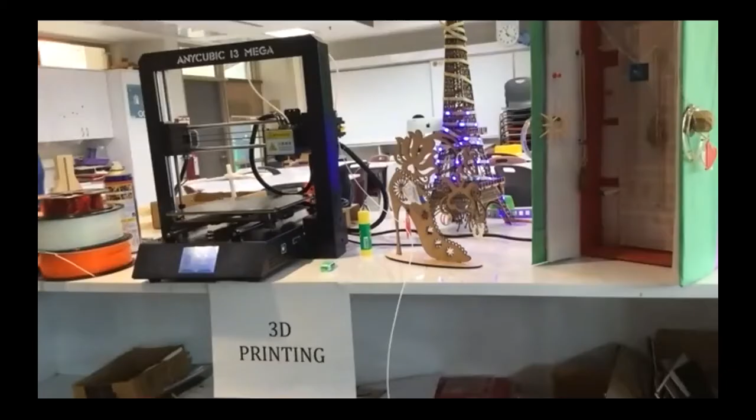So what all can you make with the 3D printer? Great question, ma'am. So tell me anything, any object that comes to your mind, and I'll say whether we can print it or not.

Then it will give you a vision like, oh, it's all over the world. Like starting from the human body, in today's time, 3D printers have developed so much that they can print a little tiny, you can say, live heart. Yes. 3D printers can give you stem cells, which we can use in different cases of a person suffering from major diseases.

The objects behind, are they all printed from this 3D printer? The Christmas tree, which is like the Eiffel Tower, I can see behind it. Is it printed through a 3D printer? Okay, so whatever is in the background, it is a mixture of laser cutting and 3D printing. Laser cutting we will be having tomorrow. Today we will be focusing on 3D printing itself.

So I'll just show you how a 3D printed Eiffel Tower looks like. So let's all begin. And this going to miniature pieces, the size all depending upon the printer size, or it's just what we said? You're correct.

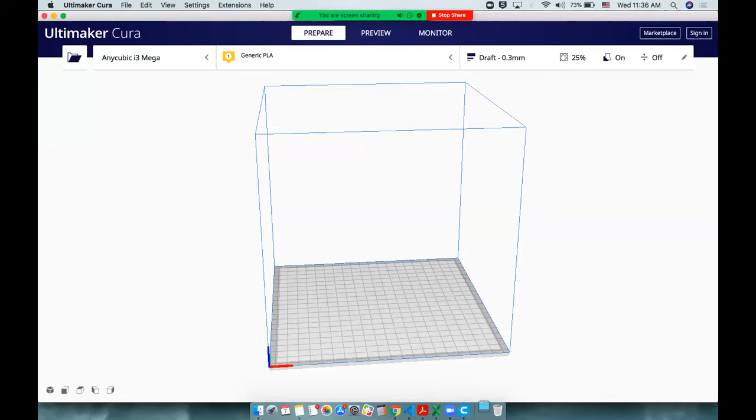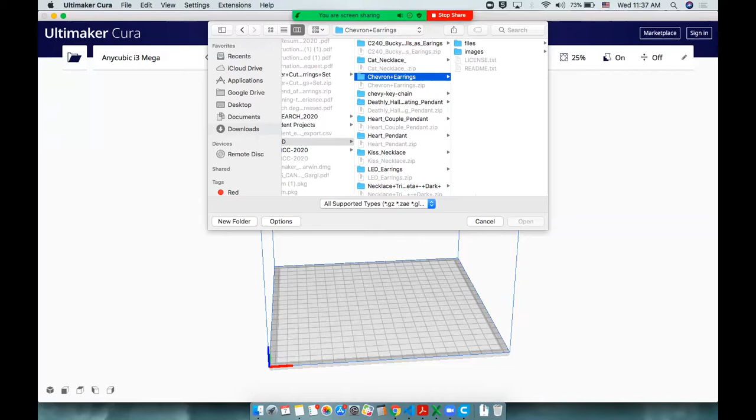Let's try this one. Okay, maybe I have already downloaded a few files. I'll use them. This is your load option where you go and select from your system where your files are stored. So let's go to this one. Okay, Mr. Delfino is here. Fine. Let's go to this folder, file. Yes, these are all STL. I can work with any of them. I'll select them. Okay, now the files are loaded.

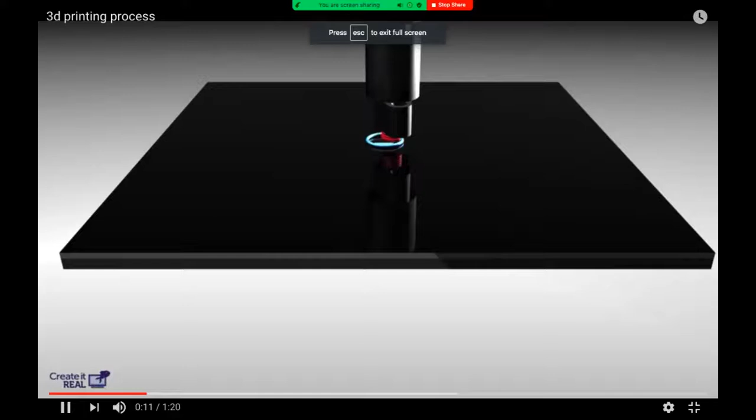Now this slicer will give you a virtual experience of the actual process which will happen on your 3D printer. Now, when things are happening on a 3D printer, there are various stages. Okay, so I would like to stop here and show how 3D printing actually works. Then I'll explain every step. I'll show you something. So let me share my screen again. Share. And I would like to show you the actual 3D printing. Go through the video. I'll again replay and I'll start explaining.

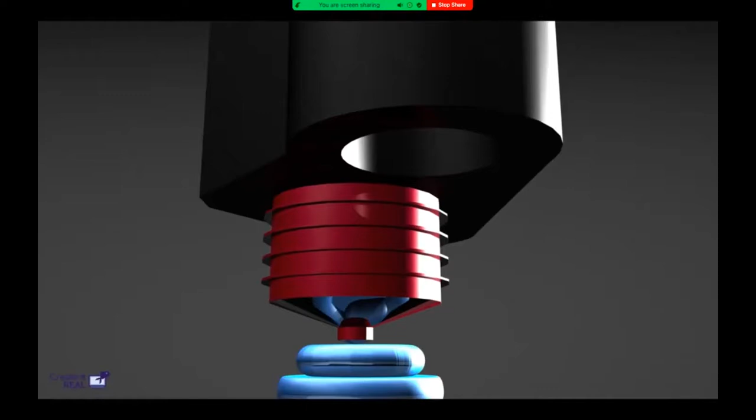Perfect. Now, this particular plate is your build plate where the actual model is building. Now, this has some length and width, okay? That is your X and Y axis. Now, this one is the nozzle. This nozzle can go up and down, okay? So this will become your third axis, that is your Z axis. Now from this nozzle, the entire assembly is called extruder.

Okay, let me write it. First we discussed STL, now extruder, and we discussed the build plate also. Okay, now the extruder is not a single entity, it's a kind of assembly. It will have a thermistor, a temperature sensing device. Now, why do we need temperature? We need temperature because of the actual material with which we are printing, for example, we are printing this Eiffel.

So in this Eiffel, the filament or the material used is a plastic material. Okay. The printer which we have can only print plastics, or polymer, we can say. Now in this polymer also, we have only a few categories of printing material, that is PLA, polylactic acid polymer. Then we have ABS, and then we have TPU. Now these are the basic acronyms.

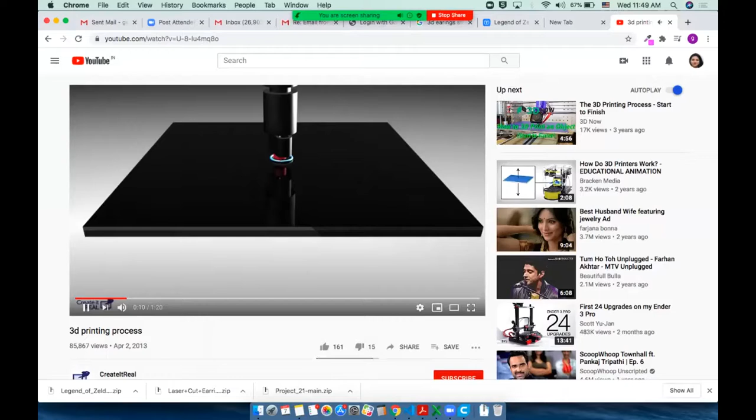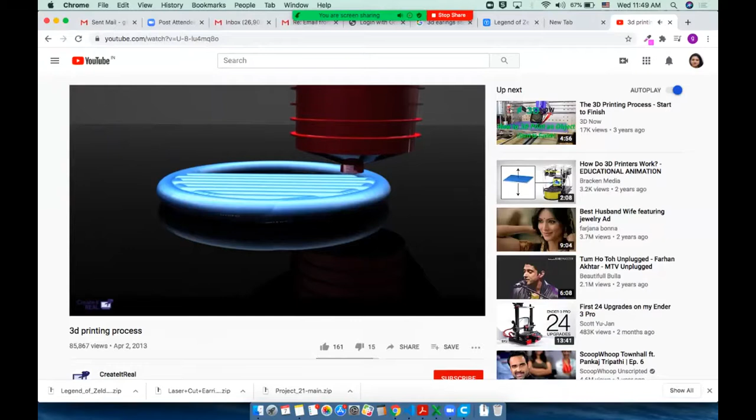Now layer by layer we are dropping that liquid. Basically we are changing the Z axis with the help of the nozzle, and your X and Y axis remain constant. So layer by layer. Now how are these X, Y, Z axes generated? That is where your slicer comes in. This slicer, this platform, will convert all your curves, edges, holes, every minute detail into 3 coordinates, X, Y, and Z. Now how does it do it? That is your slicing part.

So once you slice it out, it converts the STL extension into G code. So what is the role of the slicer? It will convert the STL code into G code. G code is a generic code or geometrical code, with which the actual 3D printer works.

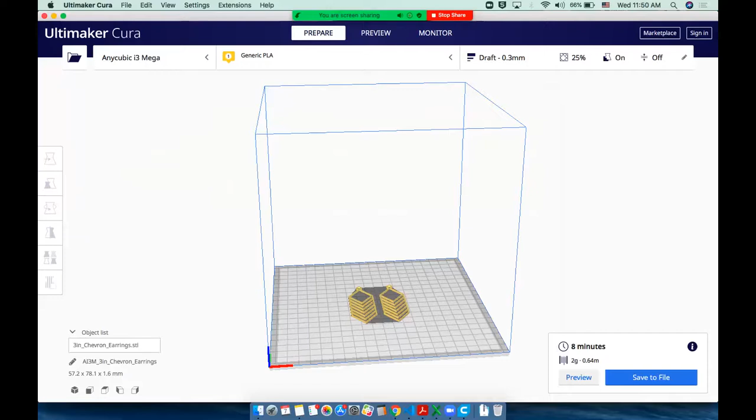Now, during the conversion, you have a lot of power. For example, you are not happy with the size with which these objects have come in. Okay, select it. You have several options. The first option allows you to move in X, Y, Z. They have a graphical aid to tell you X is this axis. You can shift in this. This is your Y, and top is your Z axis.

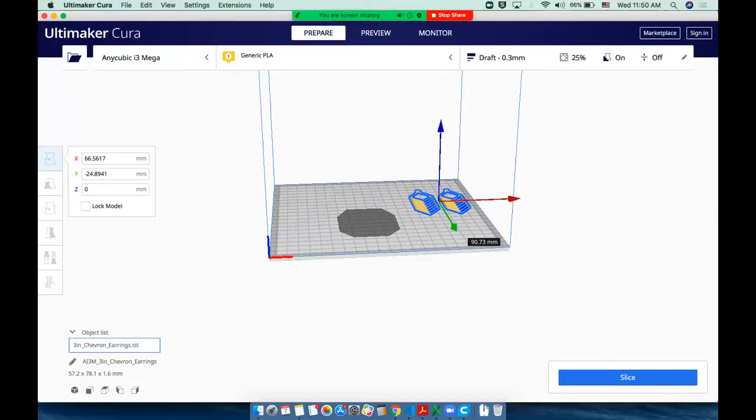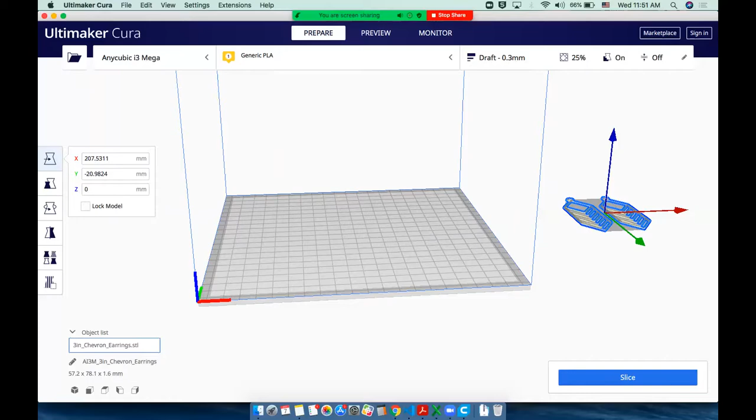Now, sometimes when you are loading the file, it by default goes outside the box. This box is your build area. If you just multiply XY, it will give you area. If you multiply XYZ, it will give you volume. So entirely, go down. Okay, this blue color box, it's a closed box. This box is your build volume. Yes, this one is the build volume.

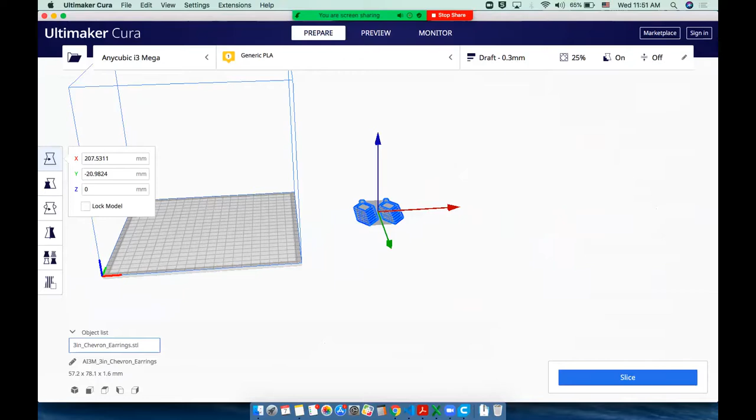So whenever the file is loaded, always keep it inside the build volume, and it should touch your plate. If it's not touching your plate, what will happen? You will turn on the machine, the machine will read the XYZ location, and without dropping the liquid on the plate, it will start doing its purpose. But if the first layer is not touching the build plate, how will the rest of the layers form? It will keep on falling. So that's why it's very important. Your object should be inside the build volume, and it should touch your build plate.

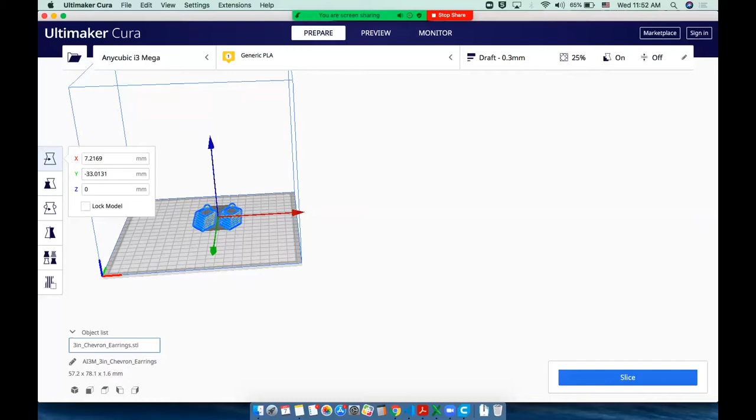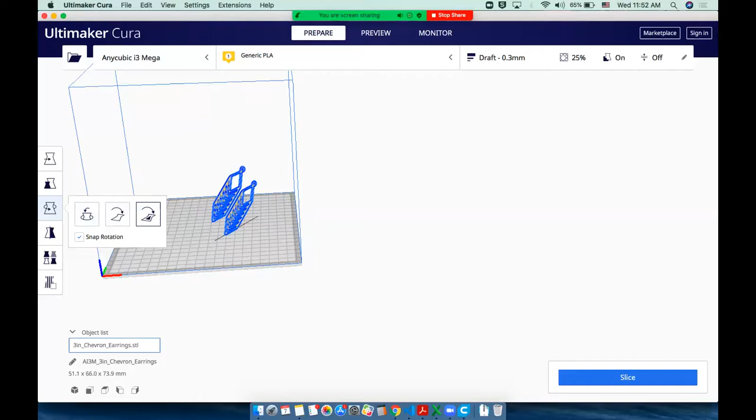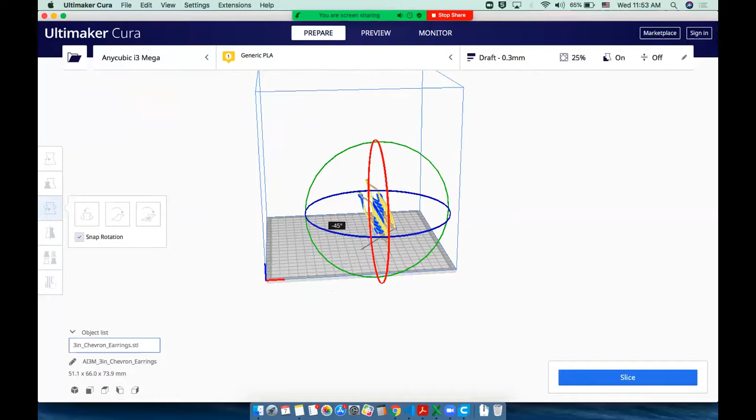Now, how to make it touch the build plate? You have an option called lay flat. You select this option, and in whatever orientation your object was, it will touch the build plate. You have other options also, like rotating the objects. When you click, okay, I just want to reset it. Now my angle has changed, right? So I can select, and these circles can help me rotate in 3 axes, X, Y, and Z. I would like to rotate it in the green one. I rotated half and then I'll press the lay flat option just for a cross check.

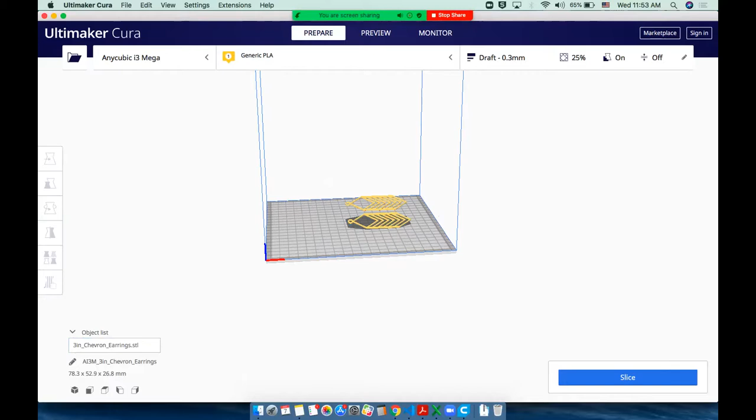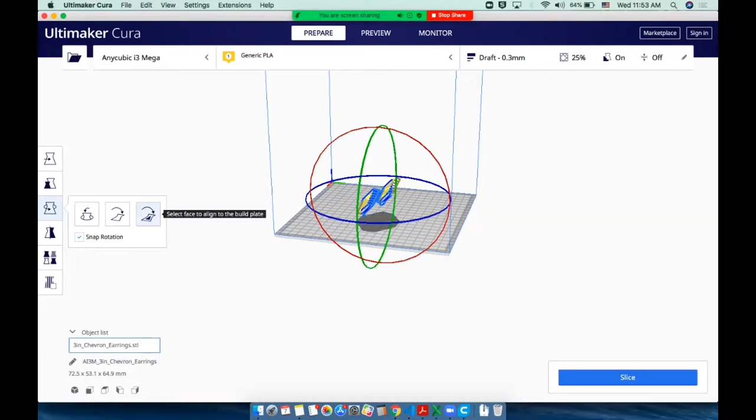Now, once this is done, if you are interested in mirroring, you can copy the object also. You can multiply the object also. Let's start with the basic one. We have placed the object inside the build volume. But I can still see it's not completely flat. So let's go back and rotate it a little bit more. Let's do lay flat. Okay, this looks perfect. Then you click on slice. It will start cutting your 3D object into layers.

But is my camera visible, like when I'm speaking and sharing my screen? Yeah. Okay.

So this particular object has layers. Like we have a bunch of hairs, and what is a bunch? It's a layer. So layer by layer, it has come up. So G codes are generating X and Y at every layer. Now, what should be the gap between the first layer and the second layer? That you can control. When you control that, you are actually controlling the quality of your 3D print. So we have categories like coarse layers and refined layers.

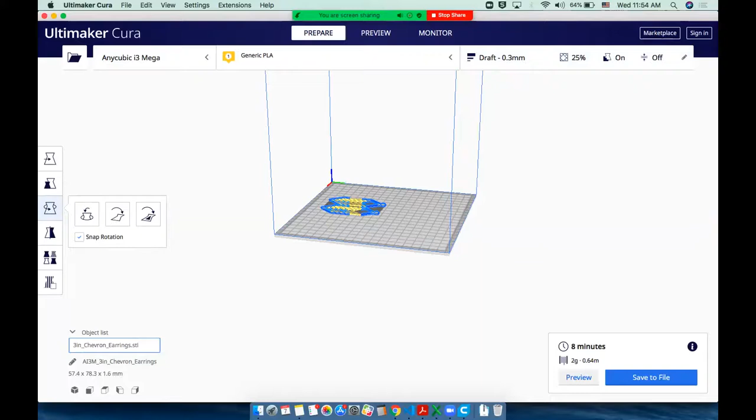If you keep, okay, yes, layer height. This layer height will depend upon various parameters, like the diameter of the nozzle. This is the nozzle. How big or how thin is the diameter which allows the passage of your liquid material. If you keep it within the range, sorry, wrong, yeah. So 0.3 means it's a big diameter for the liquid to come in.

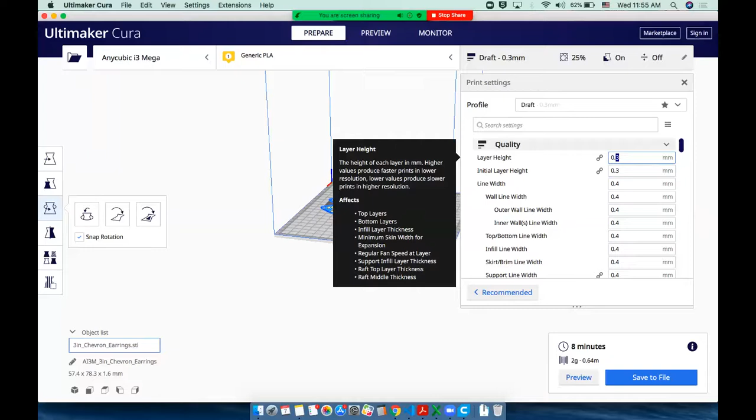0.1 will be a little lesser. So 0.1 goes into a finer or refined object. 0.3 will give you a coarse object. With a coarse object, from a distance you can tell these are the layers. But if it's a very refined object, it's very difficult to even distinguish that it's made up of layers. So that's how the layer plays a role in your 3D printing. Then these are sub properties which I would like to ignore right now because we don't have much time. I'll quickly tell you the basic things with which you can 3D print anytime without anybody's assistance.

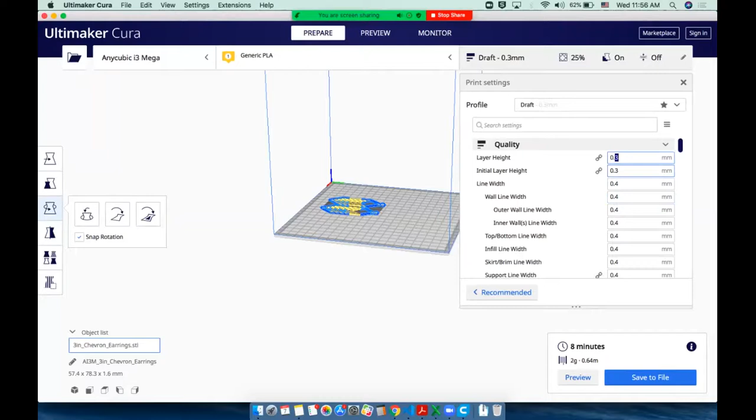Okay, so first thing, you have to take care of the layer height, and then you have to take care of what kind of support you want. So what happens if this is the initial layer? When your print will be ready, when you bring that out, the initial layer should be protected. For that you need support.

So again, the best support you can give depends upon how much time you have to print the object. If you have a lot of time, then give the best support, that is everywhere. Nowhere, everywhere. You choose everywhere. Now if you are running out of time and you know the entire piece is flat, like for this I know there is vacuum, or we can say there is no material. No vacuum, sorry, my bad. There is no material. So in this case, it's not very important to give everywhere.

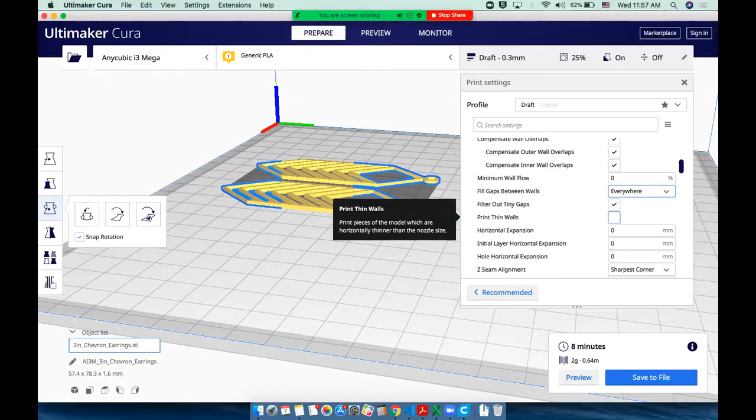Now, when you say everywhere, it will take care of this arc also. And at these square bottoms also, it will print the support material. So depending upon the object orientation, type, your need of time, you select the support material. So second category is done.

After that, you have to check the fill density. Now, what is the fill density? For example, this Eiffel Tower, how strong I want it to be from the inside. Inside strength is your infill density. Now, if you increase it to 100%, see, with 25%, it's showing 8 minutes and it will require 2 grams of the material.

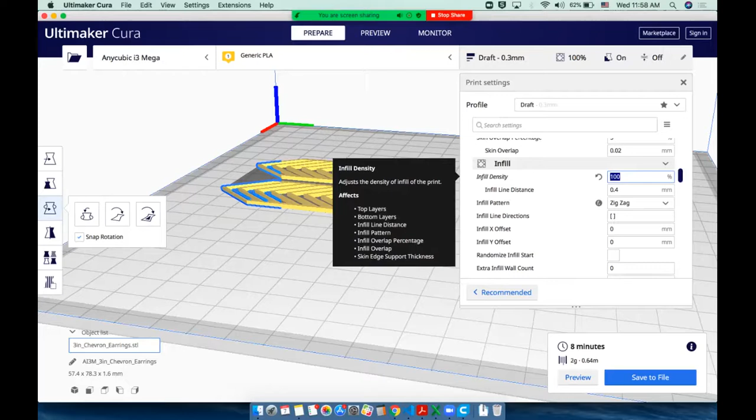If I just make it 100, okay, and then I slice it. It's still 8 minutes. That's probably because of the model we have selected, but with this, it will show you a drastic change. With 100%, it might show you it requires 12 hours to print. But with 20 or 10%, it was showing me around 3 hours, 30 minutes. So the third property which you take care of is the fill density.

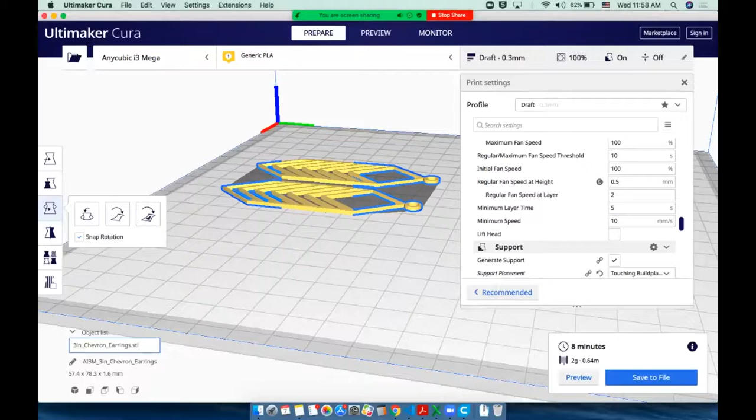Now, after that, we have to take care of the material which we are using. Why? Because we have to set the printing temperature. So PLA, I told you, with our printer, we can print PLA, ABS, and TPU. So for PLA, I put 210, and that's it. Rest, we can leave as default settings. We don't have to bother about them. And then you have to save this file.

Now, when I'm saving this, I don't have a pen drive, but I have a card reader. So I'll just use my card reader. Okay, let's say cancel. Let's say save file. No, it's still. Okay, let me change something. Let me make this 211. And now slice.

Okay, now it says save to the removable device. So I'll save this. Now it will tell you that the extension is G-code. This is what I was talking about. Your STL is getting converted into G-code. Now this G-code, you have to send it to the printer. So we covered this layer part. We covered this nozzle part also.

Nozzle is a diverging converging device. At the opening, it will be a divergent section. At the closing, it will be a convergent section, so that the velocity increases, pressure decreases. And with less pressure, more velocity, the fluid will come and the print will happen faster. Apart from this nozzle, you have a temperature measuring device with which the melting temperature of the filament is controlled. Now, once you are done with the G-code, what is the next step?

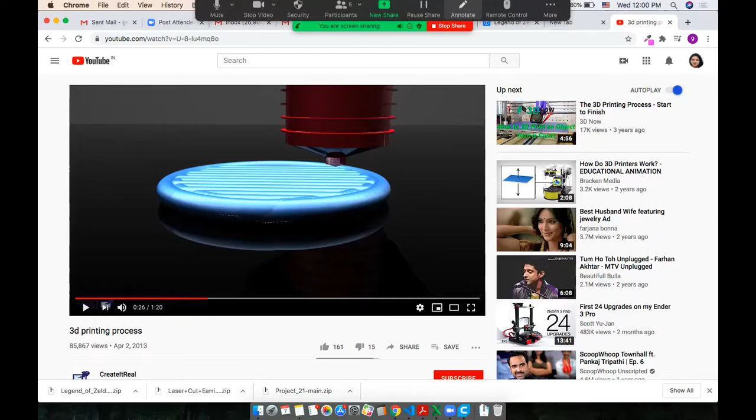So I would like you to focus. Okay, I'll just stop sharing. And I would like to focus on this iPad one. Okay. So we'll just go to the device, insert it. Is this panel visible? Okay, it's at a distance. Let me just adjust the camera. Okay, so various options are visible to all of you.

If you have to calibrate the machine, you can go to the setup and tools, but if you are just doing the printing part, just go to the print option. A number of files are coming, go to your required file name. It will show you the G-code for that. This was the G-code, and click on print. When it starts printing, by default, all the temperature, the time to print, the material to use is fed into the system.

Now, the rest is the automatic thing which your machine is taking care of. I'll explain how the process is happening, what we have seen in the video, and how it will actually happen. So, let me just remove the iPad first.

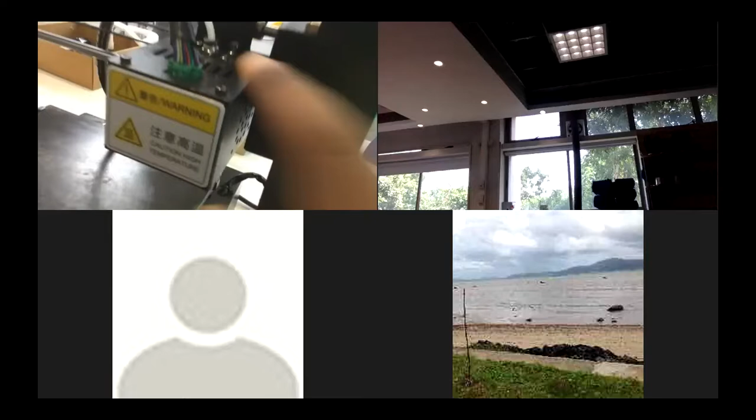Okay, that's enough. Now, this material is getting fed into the extruder through one of your stepper motors. Okay. Yeah. So this part is your stepper motor, in which the actual filament is fed. Now, step by step, your filament is pulling or pushing inside the nozzle. Nozzle is this part, or the entire extruder. It has the heating device, temperature sensing device, and the nozzle.

Let me show you. This is your tiny nozzle. This one. Now, what will happen first? The first thing is your build plate will heat up. Now, as per your different materials, you have different build plate temperatures. Why? Because when the liquid material is coming down from the nozzle, due to ambient air, it will start solidifying. But we don't want the solidification to happen instantly. Okay? We want to wait until the next layer comes in and adheres itself to the first layer. So that's why we keep the build plate at a temperature.

Okay. After the build plate takes its temperature, as you can see, the bed temperature is going to 59 and the estimated value is 60. So once this part is done, your nozzle will start heating up. Nozzle temperature we set at 211 degrees Celsius. Slowly it will rise up. Now, once this part is done, your extruder will take the origin value.

For example, in our slicer, let's go back to prepare, close, move. Where is my object preview? Oh, I'm in layer view. No, but X-ray view. I need the layer view only, but I would like to go to prepare. And in the prepare, where is it? Okay, let's reload again. Okay, it's here.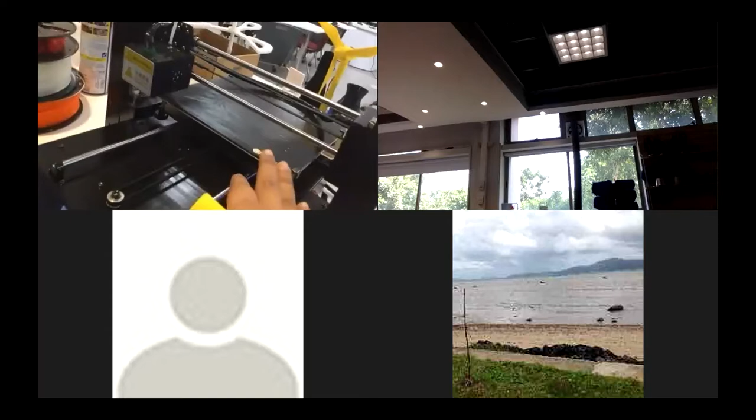Meanwhile, I'll discuss with you some maintenance. Yeah, just see. First, it's going to its home position, both the nozzle and your build plate. And always remember, for better adhesion, we use some kind of gluing element on your build plate. I have already used it, so I'm not using it right now. Now it will take the appropriate Z location.

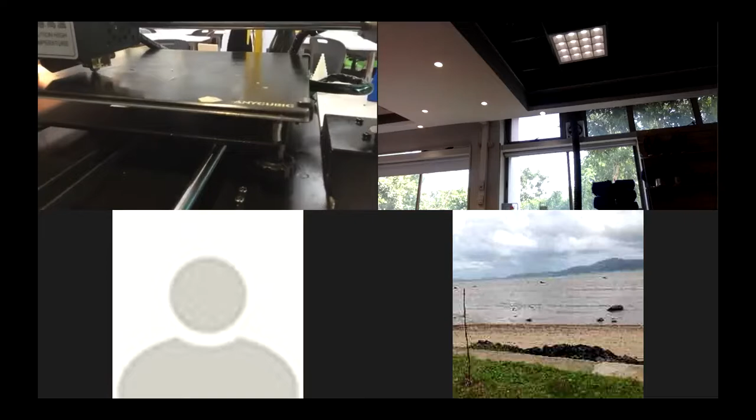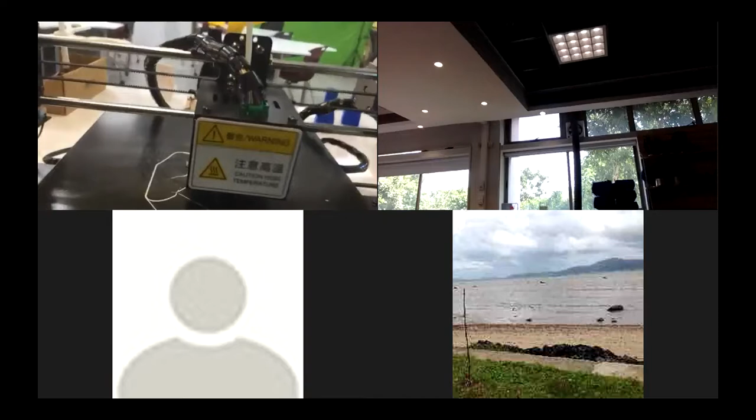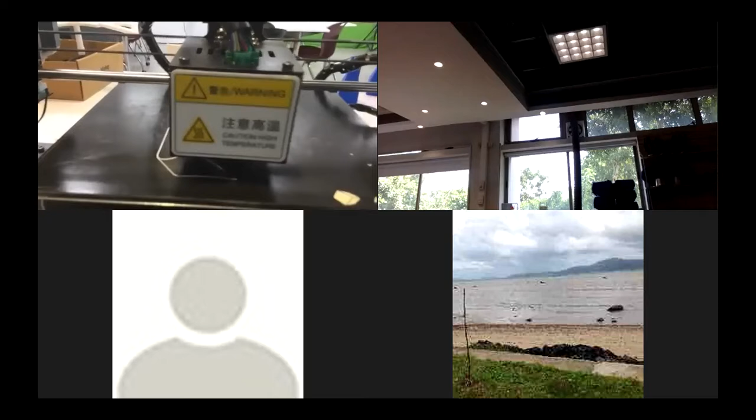It has started printing at the exact location where it was on the slicer. And the first layers are coming. Okay, this is better. Okay, so this place is having less gluing material, so the initial layers are not sticking perfectly. So in such cases, what we can do is stop the print, restart the print, put the Fevi glue, and things will turn out accordingly.

So let's discuss meanwhile what maintenance we have to take care of. So the very first thing we have to take care of is, after every print, clean your bed plates. Okay, you can use any soapy water and a normal cloth to clean the bed plate. For the nozzle, there is a proper cleaning procedure which needs at least 30 minutes of time. So I'll skip that part.

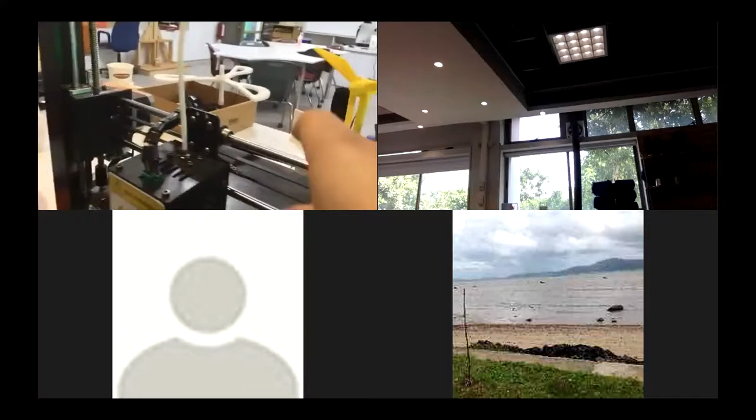Now all the moving bodies like this rod, your stepper motors, are on this steel rod. Okay, all these, this one also, need to be timely lubricated. So one of the best lubricating and cleaning materials we use is WD-40. It cleans and it provides perfect lubrication at the same time. So see, the print is very bad because of the initial layers not adhering. And one more reason can be, I'll just stop this.

One more reason is your bed leveling is not proper. Now, what is bed leveling? I'll just give you a verbal description. Bed leveling means, see, this is your entire bed, okay? It has 4 corners. Now, at all the 4 corners, your nozzle should touch at the same Z location. But because of some inclination, very minor it is, but it is there.

Because of inclination, that is your bed leveling error, your Z location is different here, and the first layers which are coming and dropping on the build plate are not dropping as a flat one, they are dropping at an inclined angle. As a result, your first layers start detaching from the build plate. So, bed leveling is one of the reasons why your prints are not good.

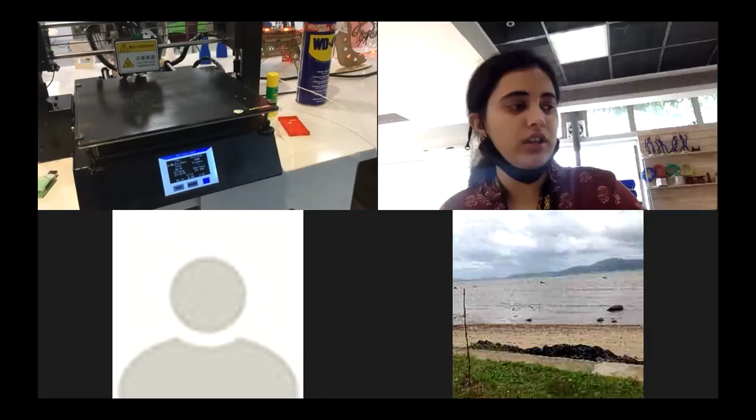Okay, not having a correct temperature is one of the reasons your print is not good. The quality of material you are using decides a lot what kind of print quality we will have. So Guna, this is how the entire printing happens, starting from a 3D model to an actual 3D prototype. You have any questions, queries? You can ask me. Even you, Joyce, also.

So tell me one thing, let's say I'm not downloading any model from anywhere, I want to create something, how can I do that? Yes. So for that, you need a CAD software. Yeah, I know that. Oh, perfect. So we have multiple CAD softwares. Few are online also, 3D modeling online softwares. You can go for SketchUp, Vectary or Tinkercad. Tinkercad is most widely used. Vectary I have recently started using and I find it quite interesting, it's very friendly to a designer.

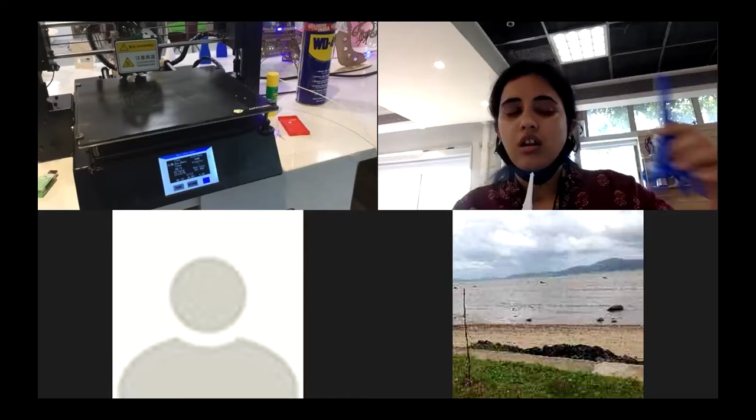Okay, and one more thing, let's say I have some kind of object with me. Can I scan it in a 3D way? Perfect. Yes, you can do that. For that, we need a 3D scanner. We try to work with the 3D scanner in our makerspace, but the scanner has a limitation. It can scan only miniature objects, not the big ones. And that scanning has a lot more procedure involved, but you can do it. Okay. So we can do it. Yes. Okay. Thank you.

Any other thing? Nothing. That's it. Thank you for the demonstration. Okay, fine. As a feedback, just share what you have gained, what you were expecting, what was not as per your expectation, and what in future you would like me to include.

I mean, it's a nice initiative, to help other people understand. Mostly, I have a good idea about 3D modeling and printing and all those things, but maybe some of them gain more knowledge on this. Okay, so I accept you as an experienced guest. For an experienced guest, this beginning session was, I guess, a little boring, might be. Maybe, yeah, but fine. So even if you are attending a beginner session, was there something which I was lacking in my content, the flow of content?

What I could say is, rather than going into detailed things like how it works, you can briefly say how it works. You can maybe simplify the process while explaining these things. That would be better, I think. Okay. Thank you so much, Guna. That means a lot.